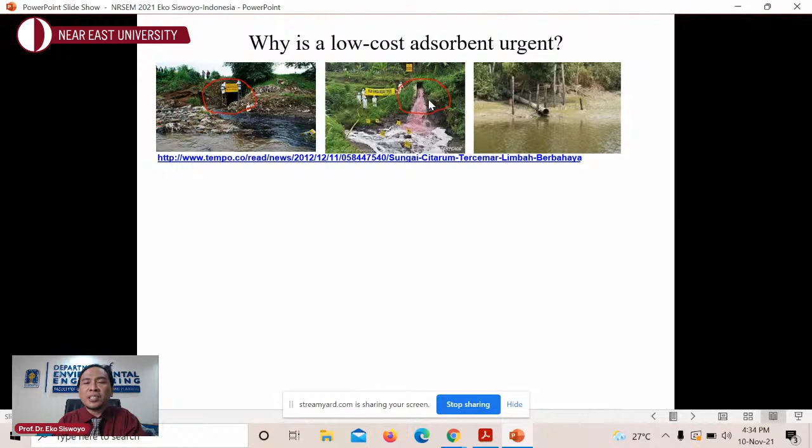Look at this, it is the effluent from the wastewater treatment plant. Sometimes the industry or company does not operate their wastewater treatment plant properly because they want to reduce operation costs. You can see on the right side a pipe. What kind of pipe is this? In Indonesia, we call it 'pipa siluman' or invisible pipe, because we cannot see this pipe all the time, only at specific times, and then it will appear.

I mean that sometimes industries dispose of wastewater directly to the river or other water bodies, but sometimes they cover up this pipe, so this pipe disappears at any time.

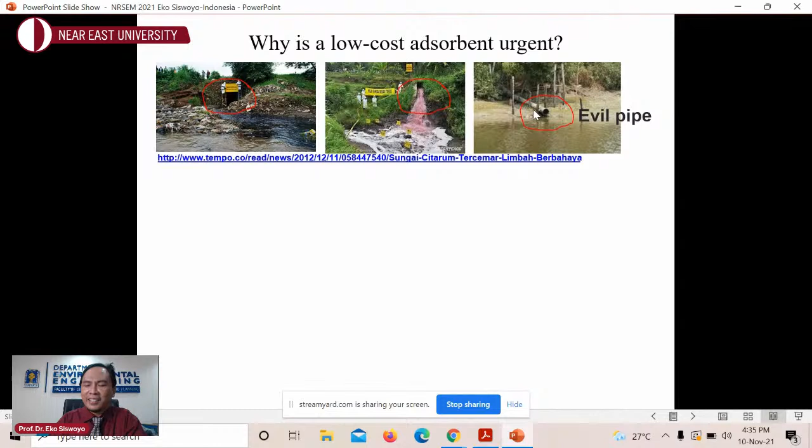And then look at some other problems. Lead and copper in the sediment taken from Jakarta, our capital, is up to 6.9 and 4.1 milligram per liter. Cadmium in some freshwater fishes in Indonesia is also up to 0.026 milligram per liter. The water quality in most locations in the upper Citarum River in West Java is very poor.

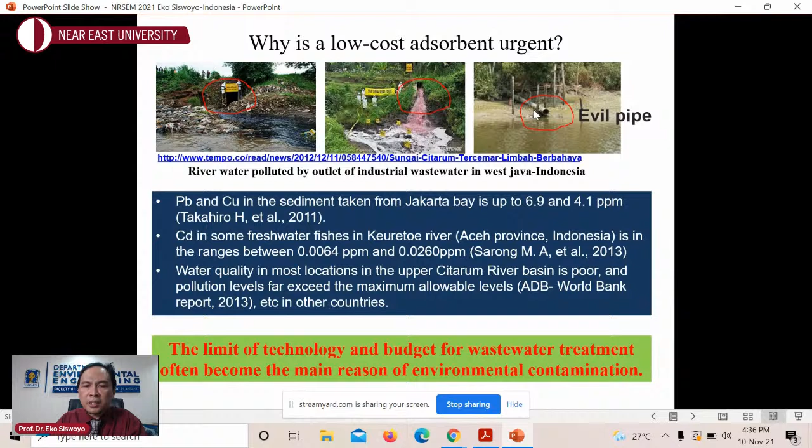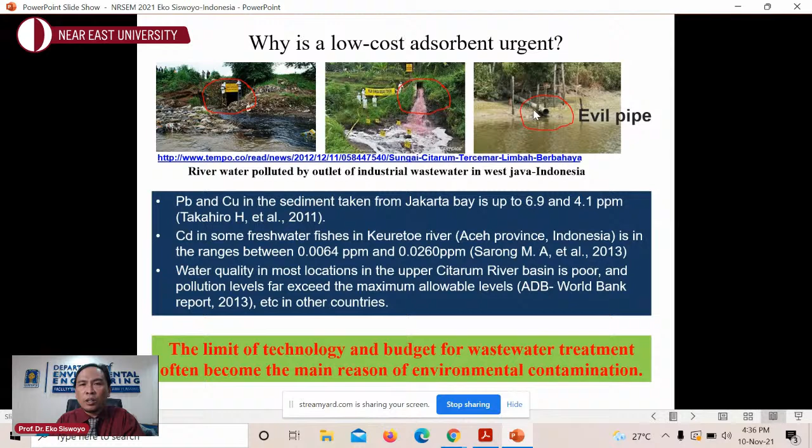Why is it very important to develop a low cost system? The problem is the limit of technology and budget for wastewater treatment plants, which is why contamination is present especially in developing countries. So it is very important to develop a low cost technology, which we call a low cost adsorbent. We know we have environmental contamination, but the most important thing is how to solve this problem.

We know some methods like ion exchange, which has high efficiency but is expensive and needs high skill, especially for developing countries, so it is very complicated. Phytoremediation is cheap and easy, but the process is slow and needs treatment of the plant after the process.

Some biologists say that when we use the plant to absorb some metal ions, what should we do with the plant afterward? We should do another treatment. We have to treat the contaminated plant.

And then there's filtration, even membrane technology, and reverse osmosis. I think the advanced filter system has high efficiency, but it's very expensive and also needs high skill.

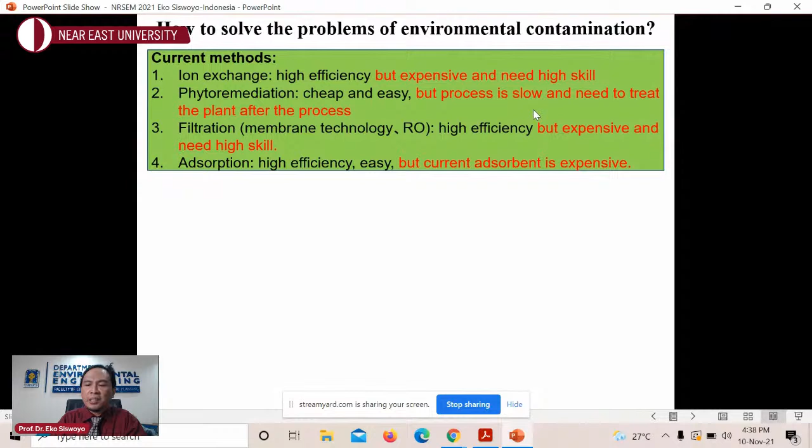What about adsorption? High efficiency, easy, but the current adsorbent we usually use is activated carbon, and it is quite expensive. So what we need is an adsorbent material with high efficiency, easy application, but low cost.

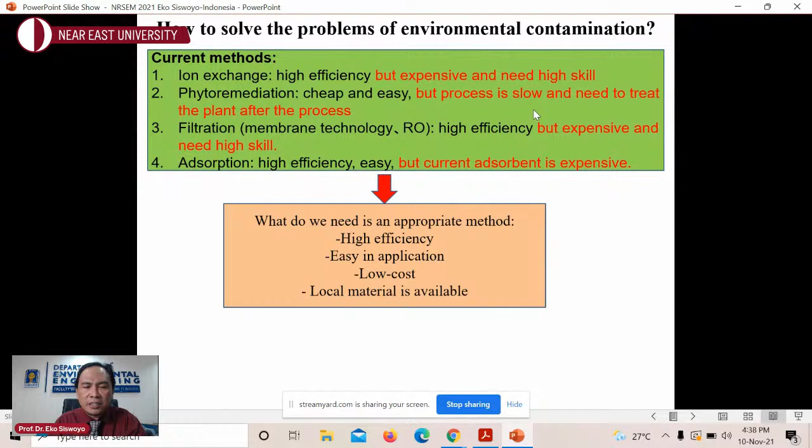Also, the most important thing is that the local material should be available. So the adsorption with low cost adsorbent is the best solution, I think.

So for the low cost adsorbent in this study, we use paper slag, the waste from the paper industry. Around 5 million tons of paper slag are discharged annually as solid waste in Japan. This means companies in Japan dispose of the paper slag into landfills, and they have to treat it, which needs money and budget.

The paper slag and other organic waste material from the paper industry could be considered as adsorbent material due to their high carbon content and cellulose fiber proportion. The application of paper slag as adsorbent for adsorption of metal ions is still very limited. So that's why I selected paper slag as the adsorbent material this time.

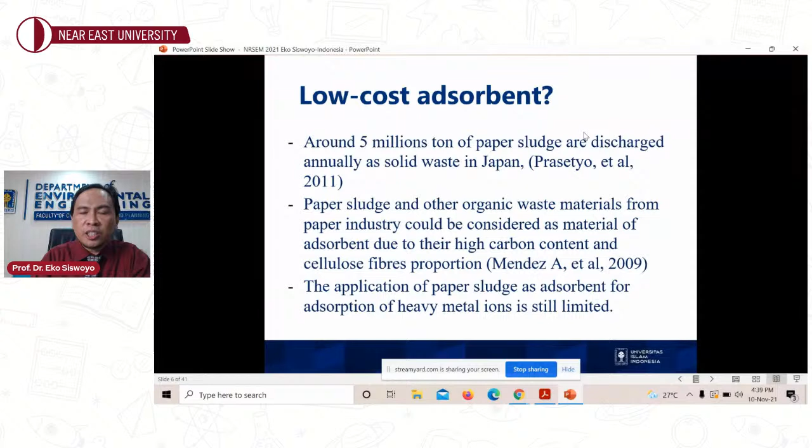How to prepare the adsorbent is very simple. From the raw paper sludge waste, we wash with distilled water, dry it at 100 Celsius degrees for 1 day in the oven, keep it at room temperature for a day also, then crush and shape it into powder form. So the paper sludge waste is ready to be utilized as the adsorbent material.

But in this study, we try to improve the absorption capacity of the adsorbent. We know that we can use some chemicals to increase the performance of the adsorbent. So this time we use phosphoric acid to activate and increase the absorption capacity of the paper sludge as an adsorbent material to absorb cadmium and lead ions in water.

It is very important to know the mechanism, so we do some characterization process. We use elemental testing, SEM-EDS, and BET in order to know the surface area of the adsorbent. We also utilize ICP-MS, and of course FTIR in order to know the functional group of the adsorbent material.

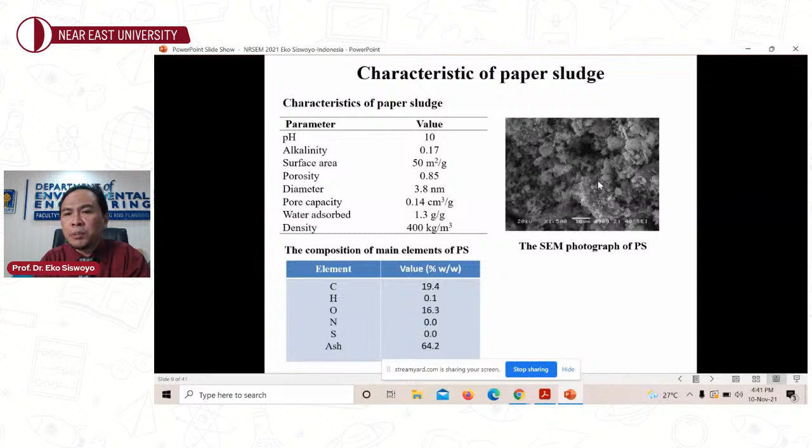It is our finding that the characteristic of the raw paper sludge has quite a high pH, and the surface area is 50, not so big compared to activated carbon. Based on the elemental analysis, we can see that the main component of the paper sludge is carbon. And this is the surface morphology of the paper sludge based on the SEM data.

When we activate it using phosphoric acid, the surface area increases almost 2 times.

When we use this paper sludge to absorb the metal ions, cadmium and lead ions, we can see in this data that at different pH, the absorption capacity is also different. Of course this is very important, because pH influences the absorption capacity very well.

This is for cadmium, and this is for lead. We can see that at pH 5, the efficiency is only 40% before activation. But when we activate using phosphoric acid with different impregnation ratios, meaning different concentrations of phosphoric acid, we can see this result. So the ratio of 0.5 is the best.

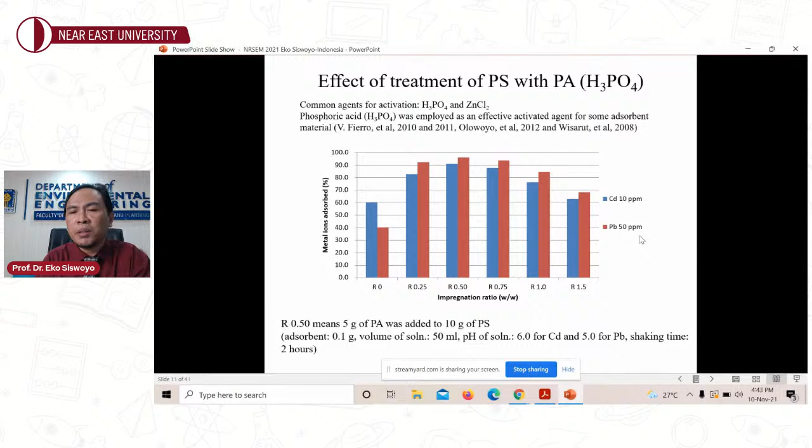So the absorption capacity for both cadmium and lead ion is more than 90% for the 10 ppm initial concentration. For the lead ion with an initial concentration of 50 ppm, the removal capacity is almost 100%.

I think it is 95% for lead, and then 90-something for cadmium ion. This means that the activation by using phosphoric acid is very important in this case.

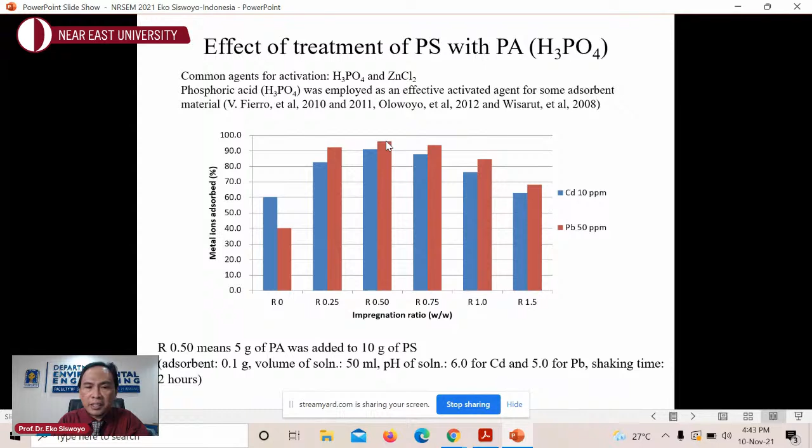Now look at the SEM data. It is very difficult to identify the effect of activation by acid solution only using SEM. But maybe we can see from this data that the surface area of paper sludge treated with phosphoric acid increased almost 2 times, from 50 to 83.5 square meters per gram.

Now this is the FTIR data. We can see that this paper sludge has some functional groups. Maybe in this part we can see this one is equal to the carboxyl group, and in this peak, the strong peak at 1080 indicates the presence of phosphate group as an effect of treatment with phosphoric acid. You can see this one.

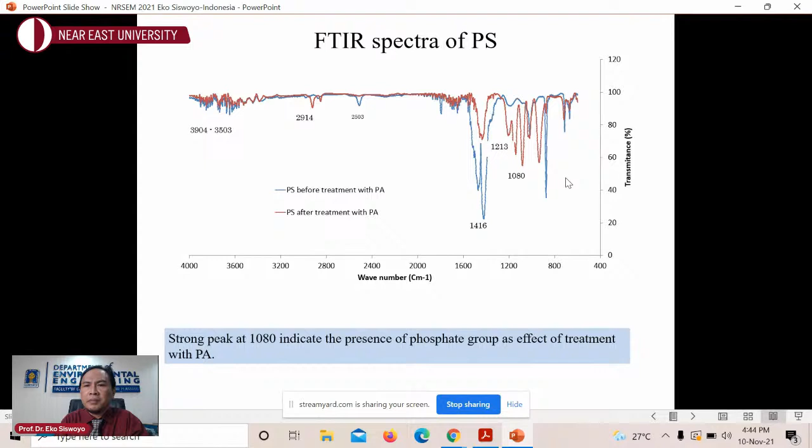Okay, and then again we try to apply this activated paper sludge with different pH. After activation, the paper sludge adsorbent works very well. We can see that at pH 5 for lead ion, comparing before and after activation, it has improved very significantly.

And then for the cadmium ion also, at pH 7 and 8 it is maybe almost the same, but at low pH 5 and 6, the effect of the activation is very clear.

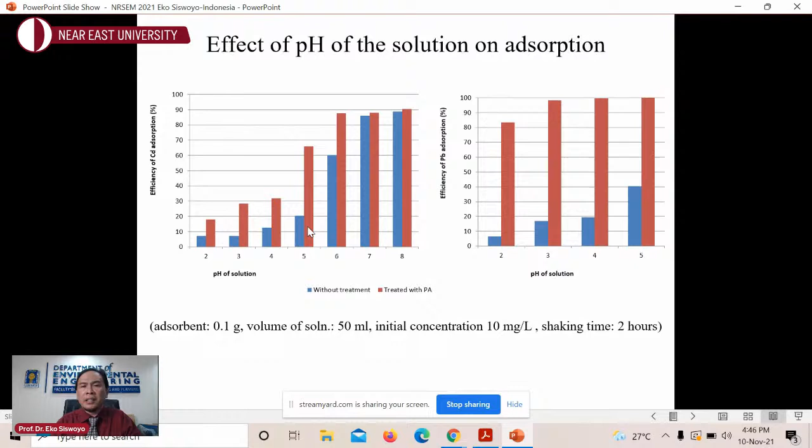So as we know, in acidic condition the surface charge of the adsorbent will be protonated, meaning the adsorbent material has positive charge. When we try to adsorb metal ions like cadmium or lead ion which also have positive charge, in acidic condition it is not good. But after activation, it improves the performance of the adsorbent. This means the adsorbent activated with phosphoric acid has a wide pH range.

And then this one, it is taking time also. This adsorbent works very fast, so within 15 minutes the absorption capacity is like this. I think it's almost the same, more than 90% absorption capacity, for both lead and cadmium ion.

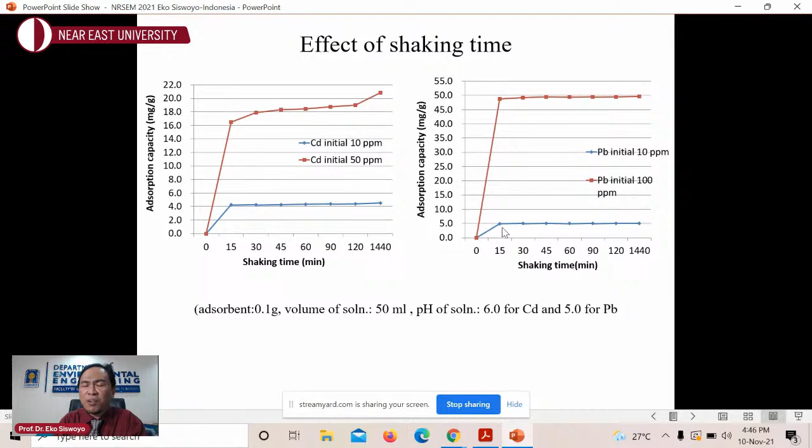So we use different initial concentrations. You can see both 10 ppm and 100 ppm for lead ion. It is already very fast, within 15 to 30 minutes the adsorbent works very well.

And then what about the isotherm absorption? By using the Langmuir model we can determine the absorption capacity of the adsorbent. We can see that for lead ion, the adsorbent performance is up to almost 140 milligrams per gram - very good I think. And for cadmium ion, almost 30 milligrams per gram, which is also high enough compared to other adsorbent materials.

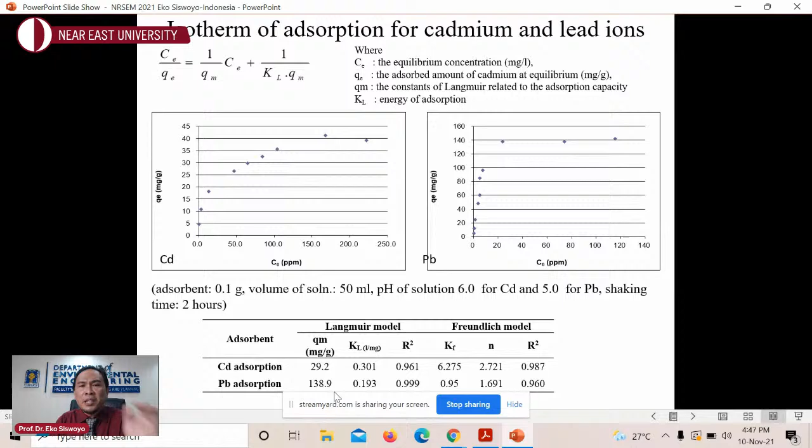So in this study we use the powdery paper sludge, and this is the isotherm data we can see. And then it's the mechanism - it is very important to know the mechanism of adsorption.

We expect that the phosphoric acid influences the adsorption capacity very well. So we used calcium carbonate like this without activation - it is similar, the form is like clay. When we activate using phosphoric acid with an impregnation ratio up to 0.5, the absorption capacity increases almost 3 times, I think more than 3 times, from 16 to 56. This means the presence of phosphoric acid, like the phosphate functional group in the adsorbent from the phosphoric acid solution used as activation agent, takes an important role in the adsorption process.

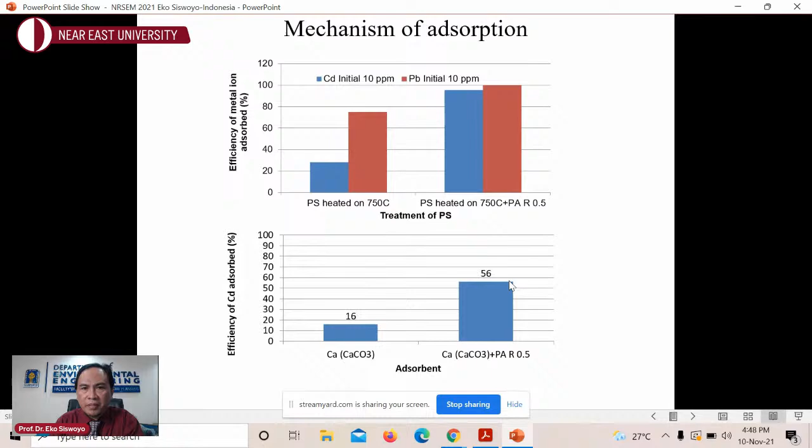And then anyway, when we use the powdery activated carbon or activated sludge, we need more effort because after the absorption process we have to separate the adsorbent material from the solution. We need a filter or decantation and so on.

So we tried to develop another kind of adsorbent material, which we call encapsulated adsorbent. We use some alginate gel and also agarose to bind our adsorbent, and then we make different kinds of adsorbent forms - granular like this, or block like this, and also fiber. This fiber adsorbent is my recent focus.

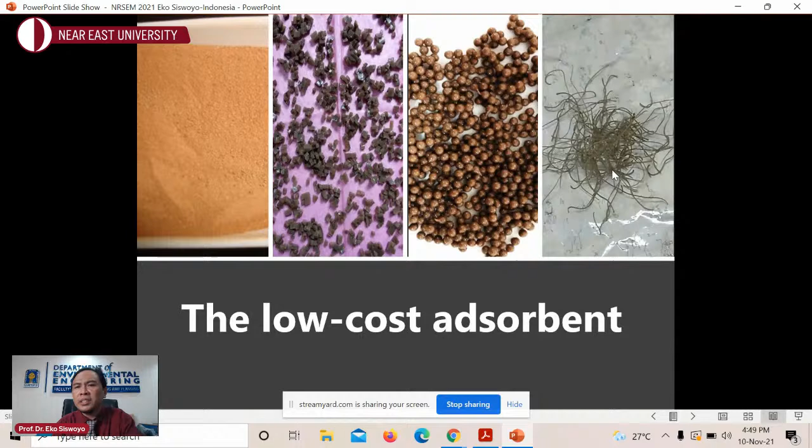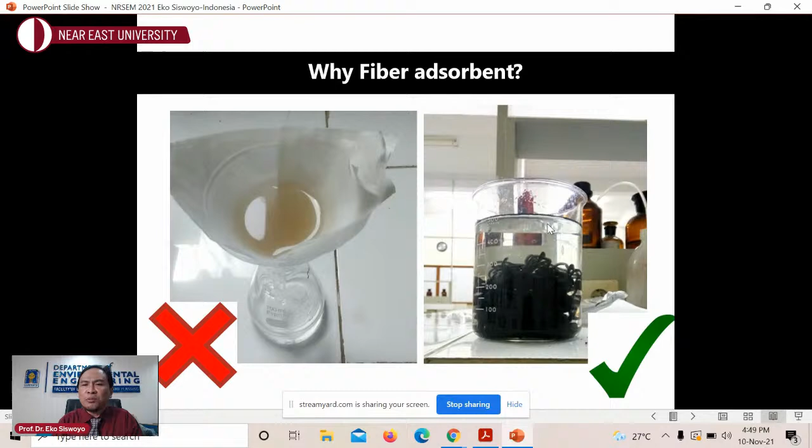So look at this one - when we use the powdery adsorbent, again you need a filter. But when we use the granular or fiber adsorbent, after finishing the absorption process we just pick up the adsorbent. It's very easy, so we suggest using the fiber adsorbent.

This was published about 2 years ago, with the same process after activation. We use another kind of adsorbent material - this one is raw sludge, containing metal ions. It is from the drinking water treatment plant sludge, and mostly it is aluminium, because the drinking water company uses coagulant, maybe aluminum sulfate, and so on.

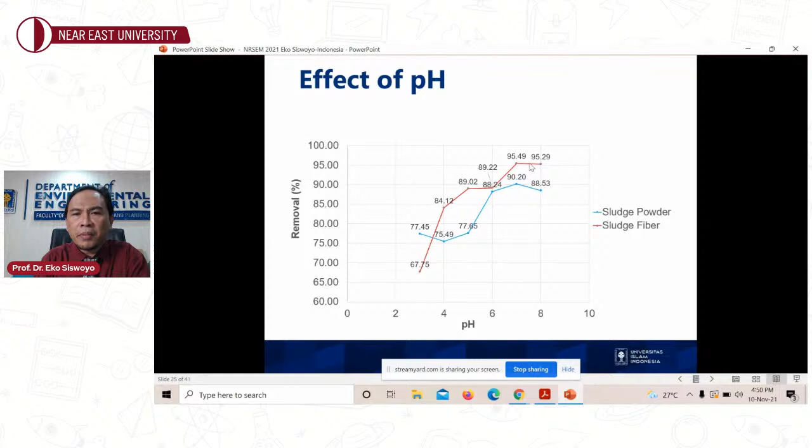Then there's the effect of dose. We use different doses or different mass of adsorbent, and by increasing the dose of the adsorbent, the capacity also increases. Then there's the effect of pH. The fiber adsorbent works very well, as you can see here.

Then the time is very important. We can see in this figure that by using the powdery adsorbent, it was very fast, within maybe 15 minutes. But when we use the encapsulated or fiber adsorbent, we need a longer time, because the surface of the adsorbent may be covered by the agent we use to encapsulate the adsorbent material, so it works a little bit slower.

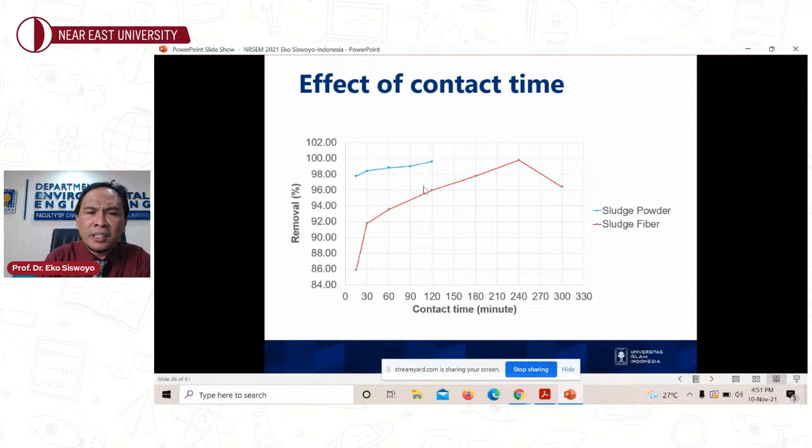So at this time we are focusing on how to get the adsorbent with a fast adsorption process. But even here we can see that within like 30 minutes the adsorption capacity is already more than 90%. So it means that even though the powdery adsorbent works faster, the fiber adsorbent also works - it's not so bad, because it's already more than 90%.

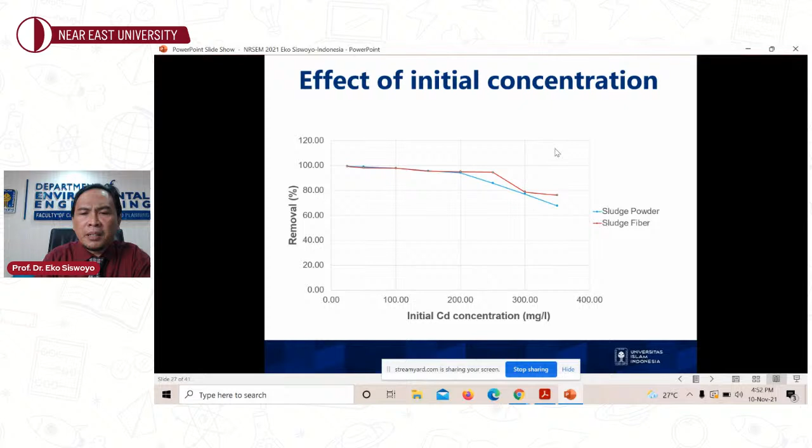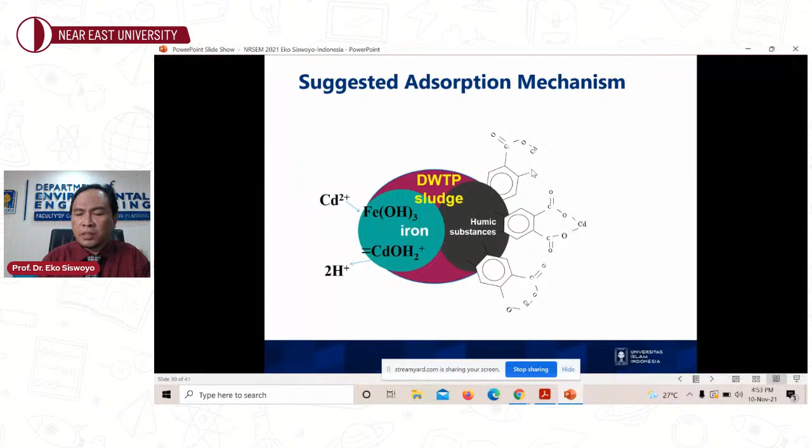The mechanism is like this for the cadmium ion: in the adsorbent there is some carboxyl group, COOH, which will bind the metal cadmium ion and release, changing to cadmium. That's why the adsorbent can adsorb cadmium ion very well, and I think the same thing happens for the lead ion.

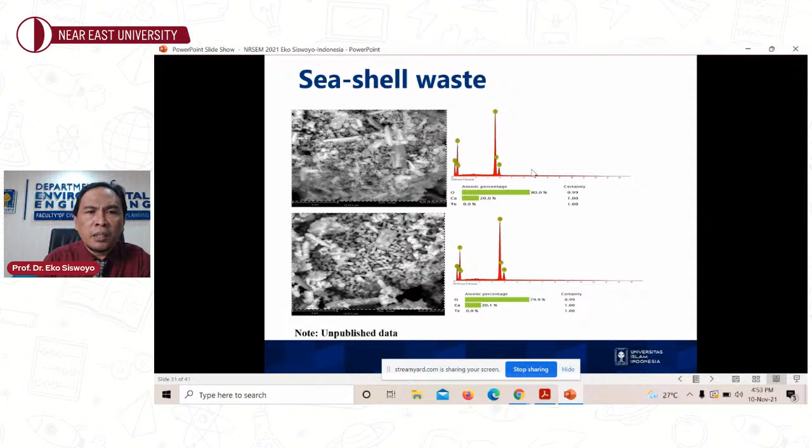At this time I also want to show you that we developed an adsorbent based on sea-shell waste, using a heating system, and the adsorption capacity is also good. By heating at 500 Celsius degrees, the adsorption capacity is more than 90% removal for the cadmium ion.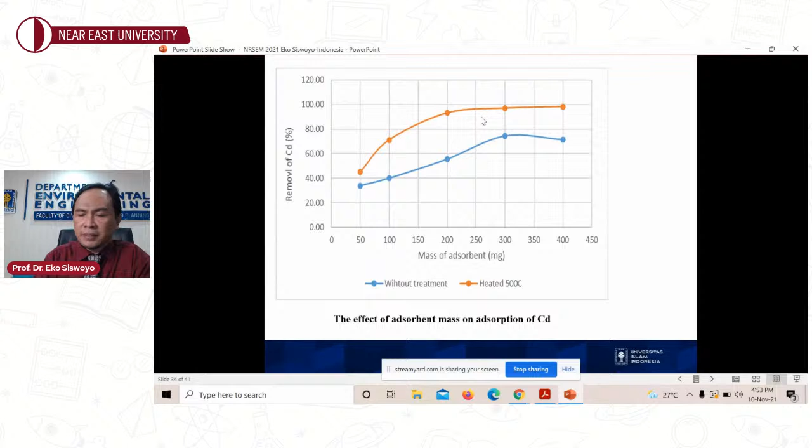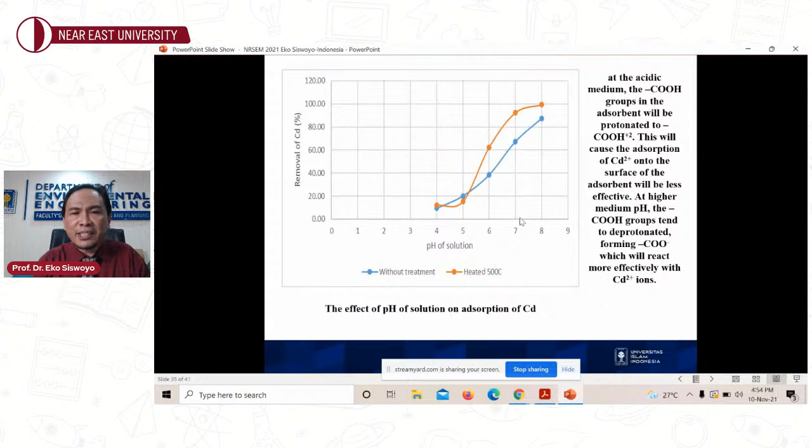Again, pH plays a very important role, because in acidic conditions the adsorbent doesn't work, since the adsorbent surface becomes protonated, and positive charges repel each other. But after pH 6 the adsorbent works very well, and at neutral pH 7 it's more than 90%. So I think we can adapt this adsorbent for water remediation or treatment of water contaminated by heavy metal ions, especially cadmium and lead.

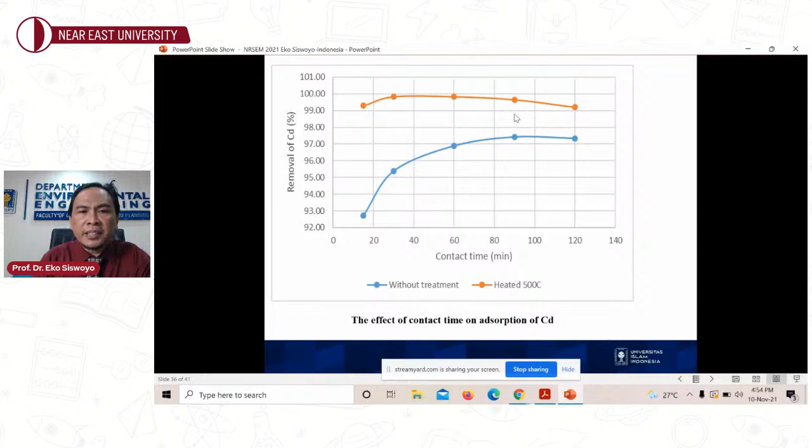As a conclusion, the ability of plain paper sludge was not so high, but by activation with phosphoric acid, the adsorption capacity increased very well. The quick adsorption process and high adsorption capacity of the adsorbent should be considered for a low-cost adsorbent material for cadmium removal in real applications.

The application of this material will give some benefits, such as reducing the amount of solid waste in the landfill, meaning we can cut the budget for waste treatment in the landfill, decreasing cost, and at the same time providing a low cost and environmentally friendly adsorbent because we can reduce the amount of waste.

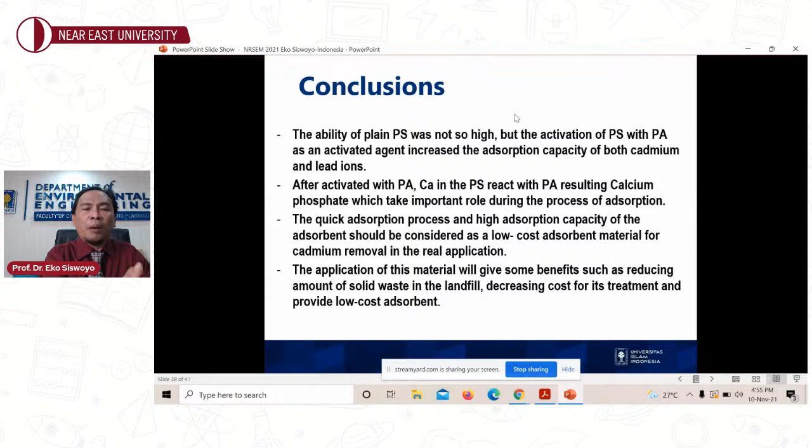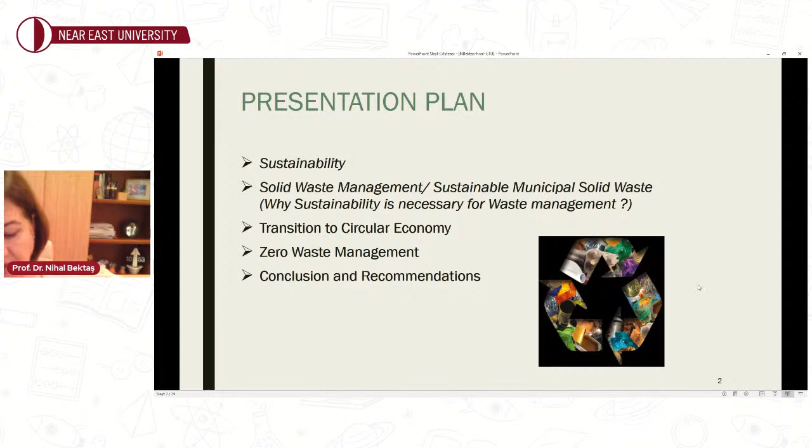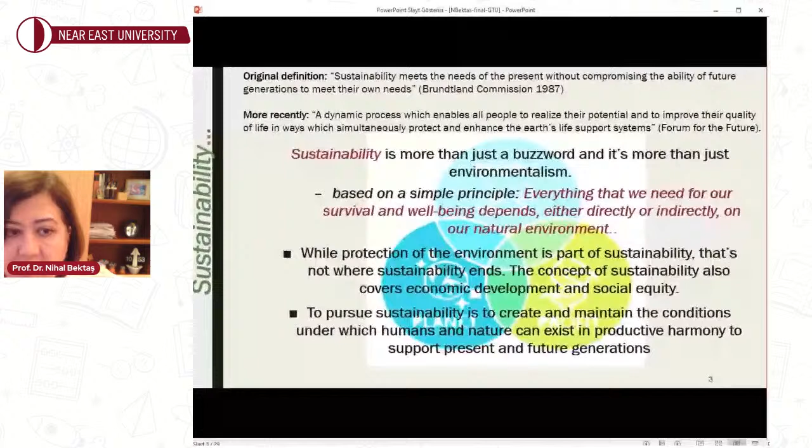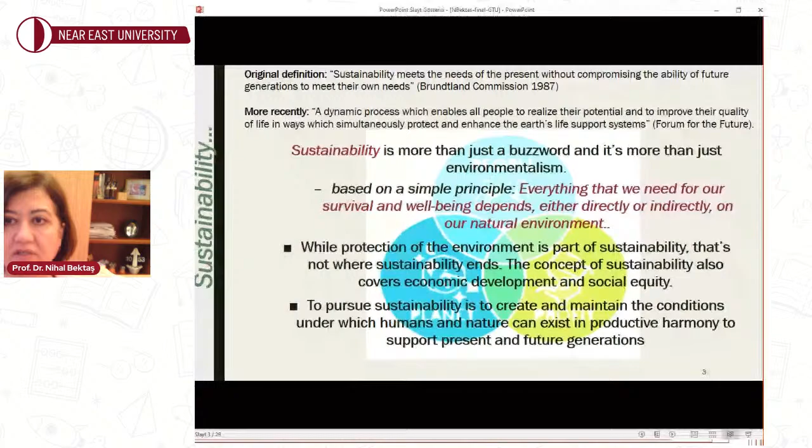What is sustainability? Sorry, I would like to see myself as well. I'd like to adjust my screen.

In the original definition, sustainability can be defined as meeting the needs of the present without compromising the ability of future generations to meet their own needs. This definition has changed more recently, and sustainability nowadays can be defined as a dynamic process which enables all people to realize their potential and improve their quality of life in ways which simultaneously protect and enhance the Earth's life support systems.

Sustainability is more than just a buzzword; it's more than just environmentalism. Sustainability is based on a simple principle: everything we need for our survival and well-being depends either directly or indirectly on the natural environment. While protecting the environment is a part of sustainability, that is not where it ends. The concept also covers economic development and social equity.

To pursue sustainability is to create and maintain conditions under which humans and nature can exist in productive harmony to support present and future generations. As you can see, sustainability is not only linked with the environment, but also with the social and economic environment, forming the three pillars of sustainability.

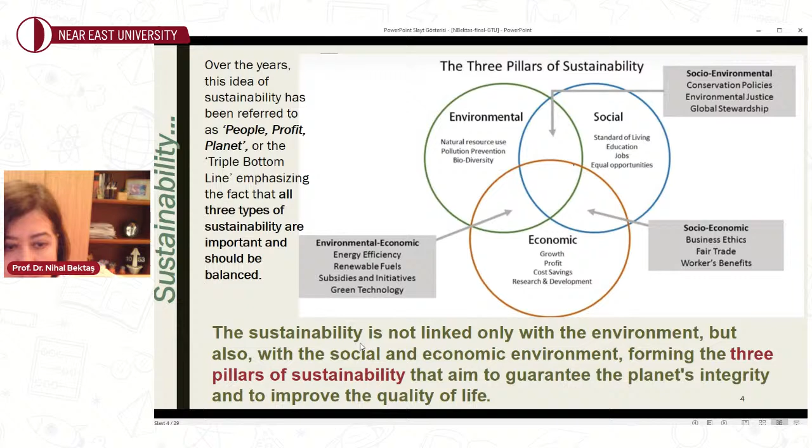However, sustainability has also changed. We have to move to a different type of sustainability. We have to move toward strong sustainability. What is strong sustainability?

Strong sustainability can be defined as three concentric circles that further emphasize the interdependence of the three dimensions. Environment is of primary importance because a healthy ecosystem is required to provide a strong society. Society and social responsibility are of secondary importance. Economic sustainability is third, because a prosperous economy cannot exist without a healthy, just society and environment.

Why did I put these slides here? Because we need to understand how modern society develops. It's useful to distinguish societies according to their type of economy and technology.

As you can see here, humanity starts with hunting society at the birth of humans, then agricultural society comes, then industrial society can be seen at the end of the 18th century, and then at the end of the last century, society changed to information society.

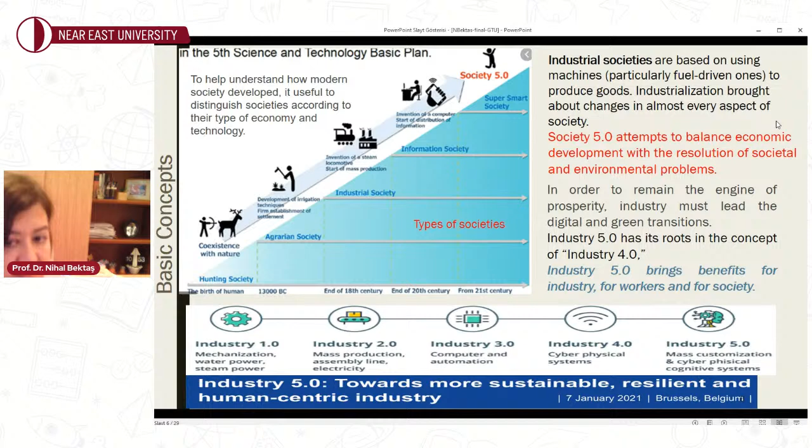Super smart technologies have become very powerful in our life, but to use this powerful technology, we need humans and a healthy environment. Therefore, sustainable, resilient, human-centric industry is becoming important in this century.

So how can we? I'm an environmental engineer—I forgot to mention this at the beginning of my presentation. I work at Gebze Technical University, in the Environmental Engineering Department.

I put these slides in because the definition of environmental engineering has changed—it has to change, I should say. Environmental engineering works to improve ecosystem health, manage pollution, and conserve natural resources. However, environmental engineering has grown since this century, replacing the older style of engineering with a new style that makes ecology a priority. Environmental engineering's future seems boundless because it is based on many ways in which nature solves its own engineering challenges.

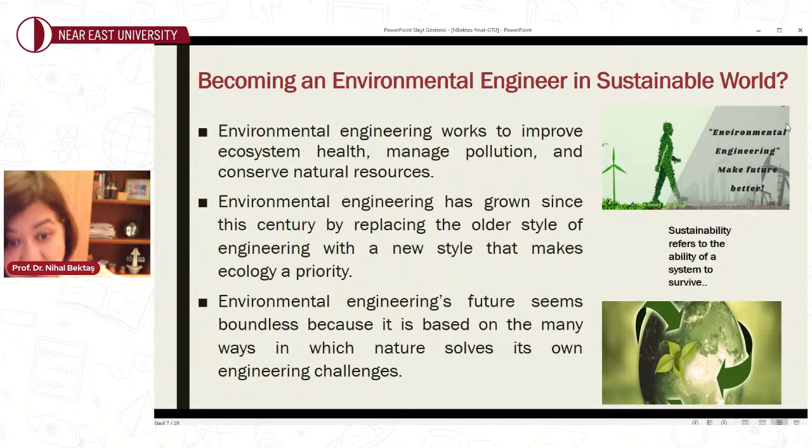Now we'll talk a little bit about solid waste, because my presentation is about the municipal management of municipal solid waste. I would like to give the simple definition of solid waste. We can define solid waste as a solid or semi-solid substance generated as a result of human activities or processes, and being no longer of economic value—what we call unwanted or useless materials.

However, these materials aren't functioning anymore to you, but may be useful to another person or process. Therefore, the definition of waste has to change to something else. As you can see here, whether something is waste with this definition is determined by how the owner sees this item or how much they value it. A material that is waste for one facility or person may not be waste for another.

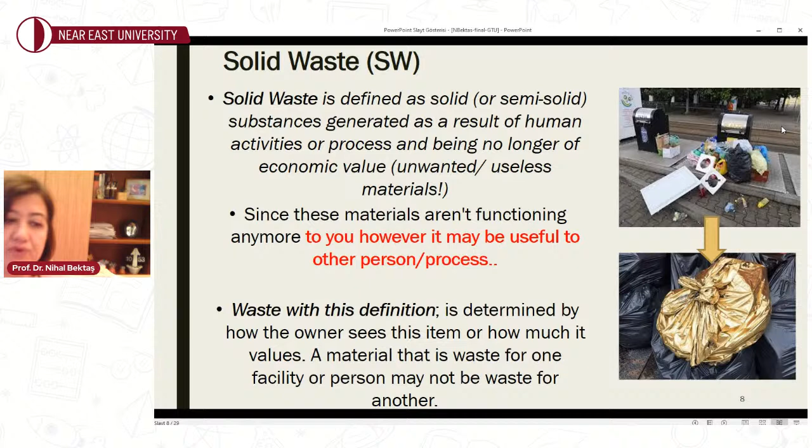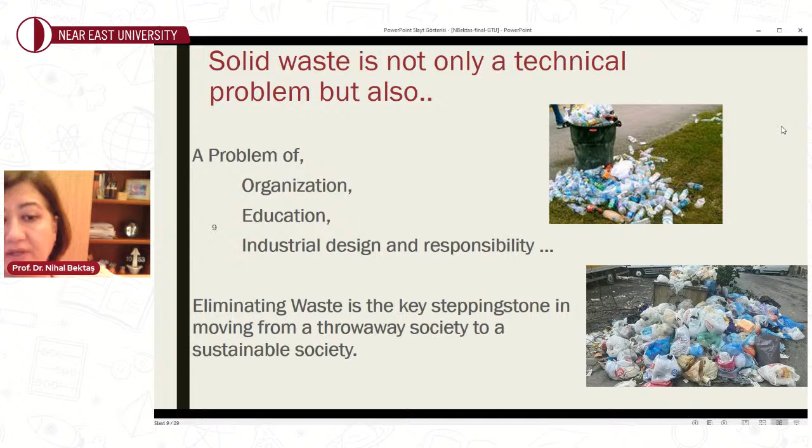These definitions are very important in the sustainable management of our solid waste. Solid waste is not only a technical problem, as you can see here—it's a problem of organization, a problem of education, a problem of industrial design and responsibility. Therefore, eliminating waste is the key stepping stone in moving a throwaway society to a sustainable society.

I would like to give the definition of solid waste management here. We can define solid waste management, especially municipal solid waste management, as including all administrative, financial, legal, planning, and engineering functions related to solid waste problem solutions. Managing municipal solid waste is challenging because of its heterogeneous nature.

Why do we need effective waste management? We need effective waste management to protect the environment, to ensure economic development, and to reduce the potential impacts on future generations. And we have to do it in a sustainable way.

Why is sustainable solid waste management important? As you can see from this apple, we already finished the apple, but we can't see it—we only see the full apple in the mirror. This is our dilemma: we forget that we live in a finite world, but behave as if it's inexhaustible, never finished. But we have already started to finish our resources.

Therefore, sustainable solid waste management is vital to conserve valuable natural resources, to prevent unnecessary emission of greenhouse gases, and to protect public health and natural ecosystems. Effective municipal solid waste management should be both environmentally and economically sustainable. It should be environmentally sustainable by reducing the environmental impacts of solid waste management, and economically sustainable by operating at a cost acceptable to the community.

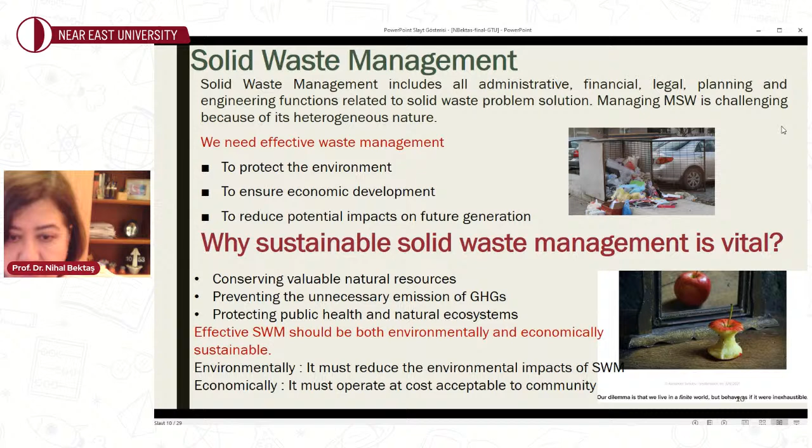Since, as I already told you, municipal solid waste can have economic value, a new economic sector related to waste has been formed. The concept of the waste economy, in the world and also in Turkey, has emerged not only to protect nature, but also to contribute to the economic cycle.

In terms of solid waste management, we have different questions and different priorities at different times. In the last century, the 20th century, it was waste management—we always asked: how can we remove waste without damaging our health and environment? In that century, the key issue was safety.

In this century, we have to look at resource management. The question should be: how do we use our resources so that future generations are not deprived of existing resources? How do we turn our waste into resources? That is the important question. Here, the key issue is sustainability.

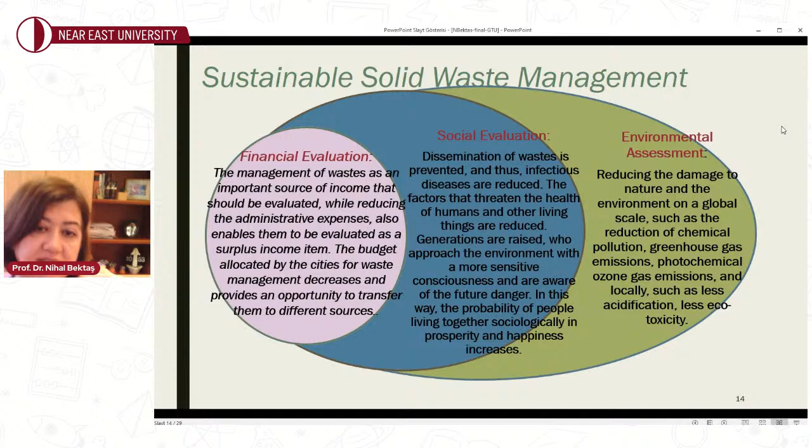The factors that threaten the health of humans and living things are reduced. Generations are raised who approach the environment with more sensitive consciousness and are aware of future danger. In this way, the probability of living together socially in prosperity and happiness increases.

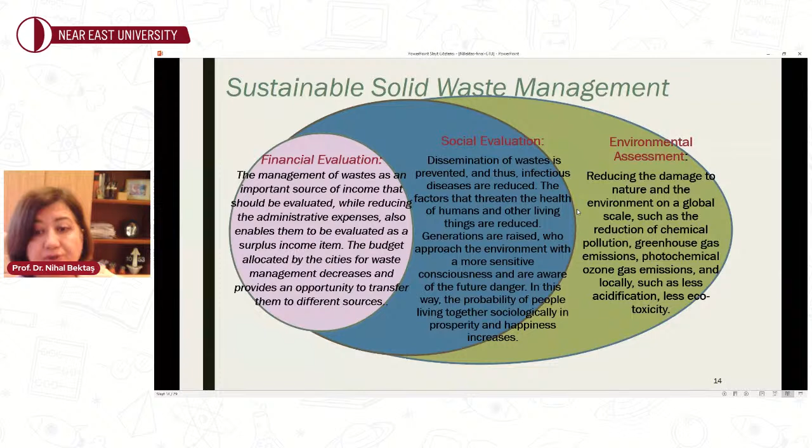In environmental assessments, we see reducing the damage to nature and the environment on the global scale, such as reduction of chemical pollution, greenhouse emissions, photochemical ozone gas emissions, and locally, such as less acidification and less ecotoxicity.

Here I would like to give a little information about the circular economy, because if we do sustainable municipal solid waste management, we have to change the way of management from the linear economy to circular economy. What is linear economy? In linear economy, raw materials and natural resources are taken, transformed into products, and get disposed of. The line is like this: take, make, consume, throw away pattern.

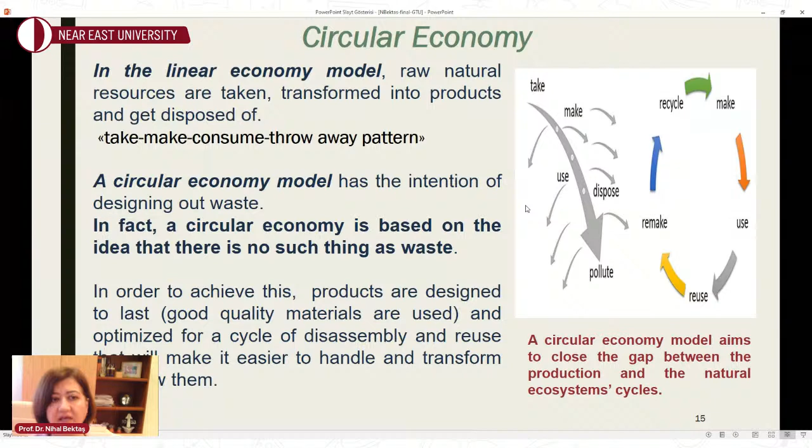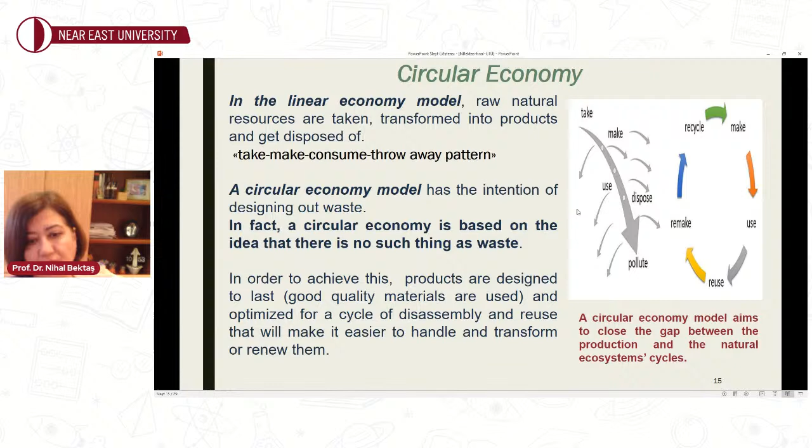The circular economy model has the intention of designing out waste. In fact, a circular economy is based on the idea that there is no such thing as waste. In order to achieve this, products are designed to last and optimize for a cycle of disassembly and reuse that will make it easier to handle, transform, and renew them.

There is a new perspective and approach turning waste into a resource and including it in the production process in environmental and economic approaches, where the value of products, materials, and resources is kept in the economy as long as possible, so the amount of waste is minimal. It means closing the production-consumption-waste management line. You have to close it, which has begun to bend by circling it.

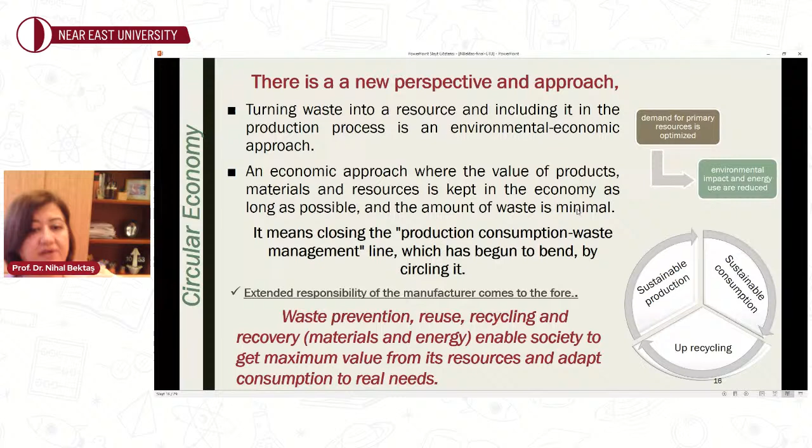Waste prevention, reuse, recycling, recovery, including materials and energy, enable society to get maximum value from their resources, and adapt consumption to real needs.

Here you can see some examples of waste raw materials. As you can see, you can get fiber, cloth fiber, textile fibers from plastic bottles, waste plastic bottles, also clothes, jeans. You can see the denim jeans here. You can get fiber from here. Also, you can get insulation materials for houses.

Another example of waste raw material is leftover food. You can mix and dry it, and make feed for street animals. Another example is you can get recycled solid dry fuel from the recycling materials inside the solid waste.

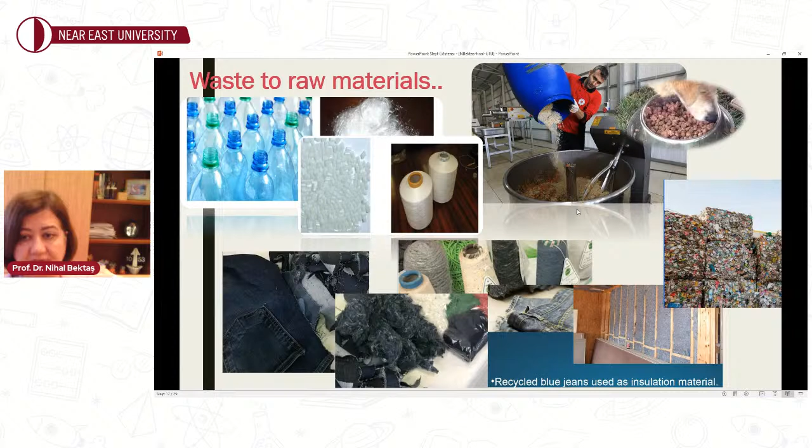What does circular economy do to your environment and economy? It makes a significant contribution to the need for raw materials and production. While waste materials are brought back to the economy by recycling, the cost of transportation, storage, and disposal is reduced, and the amount of waste going to the landfill can be reduced. When waste turns into raw materials, the number of raw materials that need to be imported from abroad also reduces.

You can save energy. When you are saving energy and raw materials, you can get more competitive—your competitiveness increases. Also, if you produce new products from your waste materials, you can get new recycled products for your customers, to prevent garbage from becoming a problem, especially in crowded and densely populated areas.

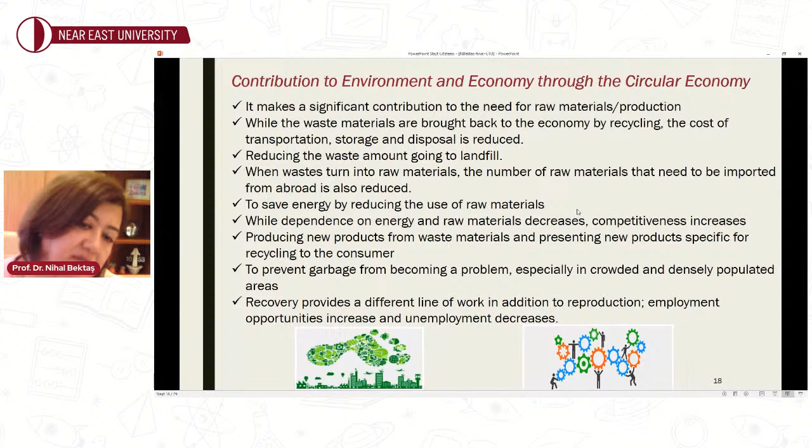Recovery provides a different line of work in addition to reproduction, employment. Also, employment opportunities increase and unemployment decreases. This is very important these days—green job opportunities.

How can we support circular economy? How can we support our municipal solid waste management using the circular economy? We can separate and collect our waste separately at source and send them for recycling. It's important. In many developed countries, they already collect their municipal solid waste separately at homes, but in Turkey, we have just started doing this these days.

We can evaluate the organic content of the waste. We can make it ready for reuse. Our decision makers, municipalities, or private institutions can increase the number of processing plants. These plants, industrial plants, can use waste materials instead of natural resources.

We can use supplementary fuel, waste dry fuel. Our private institutions or governments can install facilities such as biogas and gasification plants.

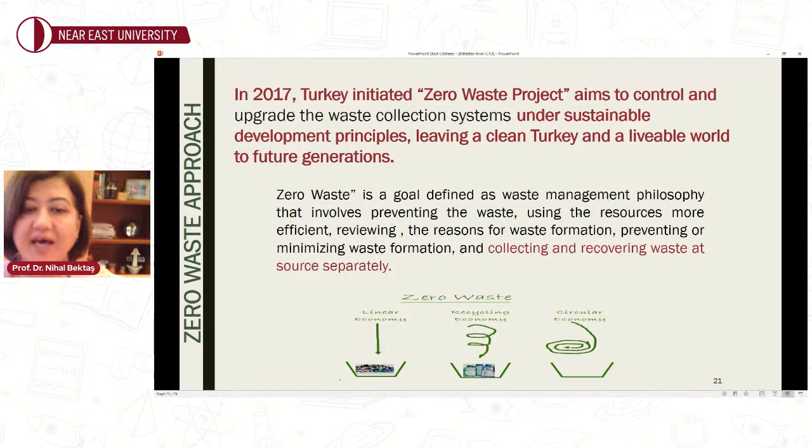In this project, zero waste is a goal defined as a waste management philosophy that involves preventing waste, using resources more efficiently, reviewing the reason for waste formation, preventing and minimizing waste formation, and collecting and recovering waste at source separately. It is important that we collect and recover the waste at source separately.

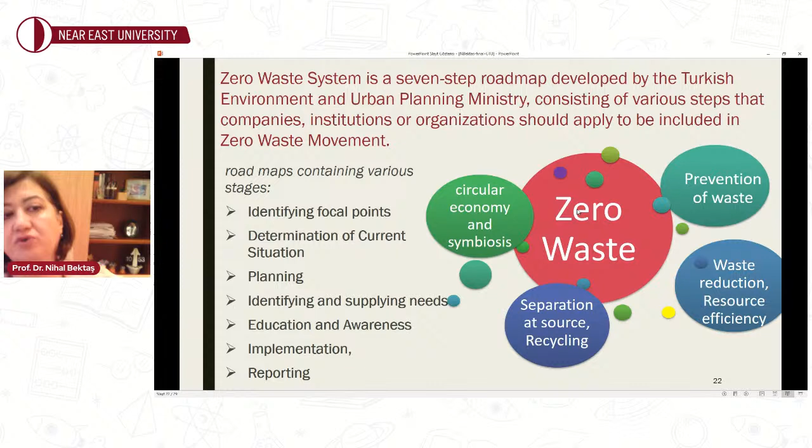What can zero waste do in our life? Zero waste can adapt us to a sustainable lifestyle and encourage people to change their lifestyles in this direction, I hope. Zero waste can reduce waste generation at home, and increase reuse and recycling.

Zero waste approaches can control storage of non-recyclable wastes. Zero waste can ensure good coordination between solid waste management sectors, creating viable financial systems for consumers, private entrepreneurs, and local authorities. Zero waste can provide employment with job security, valid wage systems, and so on.

I would like to give a few numbers here. The recovery rate of municipal solid waste was 13% at the beginning of this project in 2017. In 2017 we only collected 18% of our municipal solid waste separately, which we can recover. That number reached up to 19% last year, 2020. I forgot to write that. It is planned to increase the recycling rate to 35% by 2023.

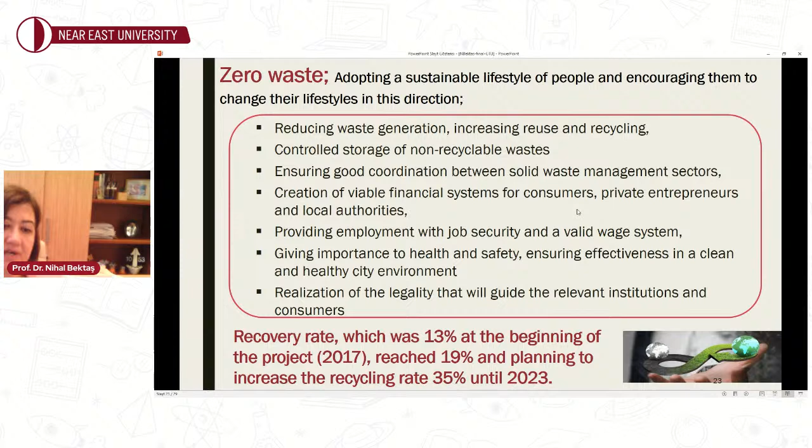We have to apply this zero waste philosophy to our life, and we have to increase our recycling rate immediately.

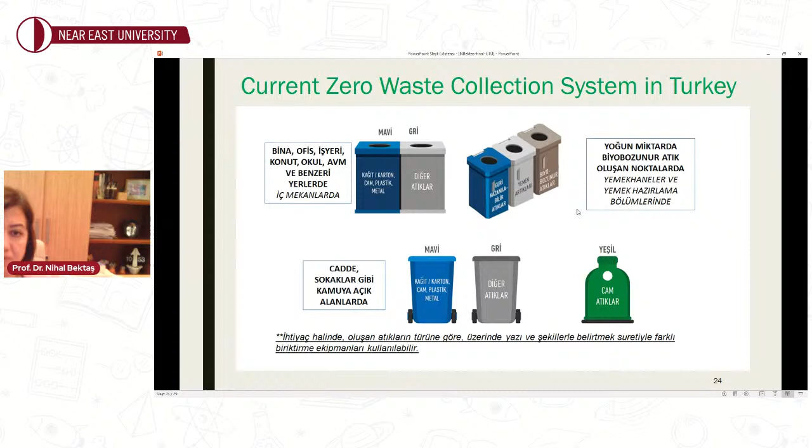This is the current waste collection system in Turkey. We have tandem separation systems at home, office, and schools: a recycle bin and others waste bin. You can find this information anywhere in the regulation.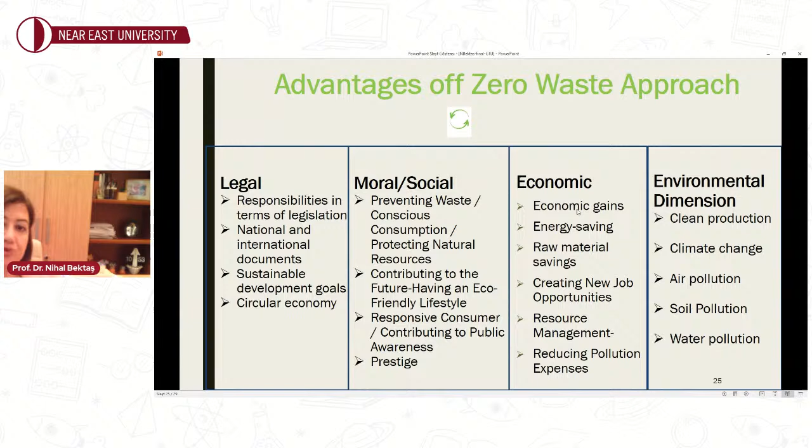These are some advantages of zero waste approaches. There are many advantages legally, socially, economically, environmentally. As I already told you, there are many good points of the separate collection of municipal solid waste and sustainable management of municipal solid waste, as you can see here.

I already told these slides before, but to summarize: we have to support sustainable municipal solid waste management. We need to consider circular economy approaches. We need to create a collaborative working environment. We need to take waste care. People should understand that waste is not waste, it is our own natural capital, and there are many advantages if we recycle this waste.

As a conclusion, we should consider environmental, social, and economic factors as a whole. We should get sustainable waste management plans. We need developed high efficiency process systems and technologies for reducing environmental impacts. For example, we can develop a software model that includes technological, environmental, and social criteria for municipal solid waste selection in a residential area.

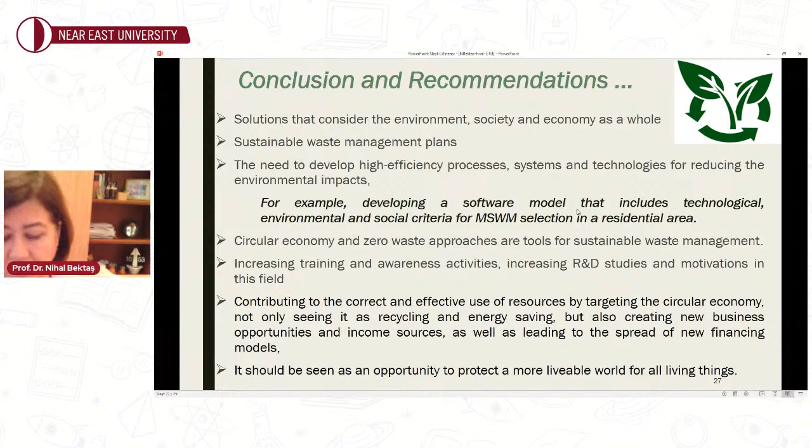Contrary to popular myth, we need to understand that the more we consume, the happier we'll be - that manipulation is not valid. On the contrary, the more we consume, the more we feel desire to consume more, and should feel unhappy about it. We have to save the earth, we have nowhere else to go.

I conclude my presentation here. I would like to thank you all for listening. If you have any questions, I can answer them.